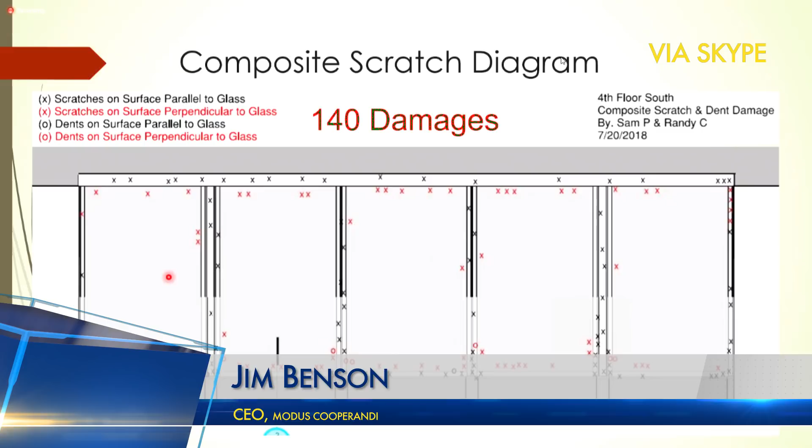So I'm going to share with you one of the first things we did. We went out and did an evaluation. A typical bay on this building has five curtain wall panels. We took 4 bays and overlaid them. So this panel right here represents 4 panels, and this one represents 4 panels. It's an aggregation of 20 panels that span from a column here all the way over to a column here, and we've just marked where we were seeing issues with the curtain wall installation.

So the X's represent where there were scratches or mars in the curtain wall, right? Correct. A red X is a scratch on the surface perpendicular to the glass, and a black X represents a scratch on the surface that's parallel to the glass. The O's represent dents, so we've got dents and scratches—one's a slightly more severe situation. But we really didn't know what we had, so we wanted to first accumulate some data so we can make an intelligent assessment of what we need to fix. So in these 4 bays, we had 140 defects or scratches.

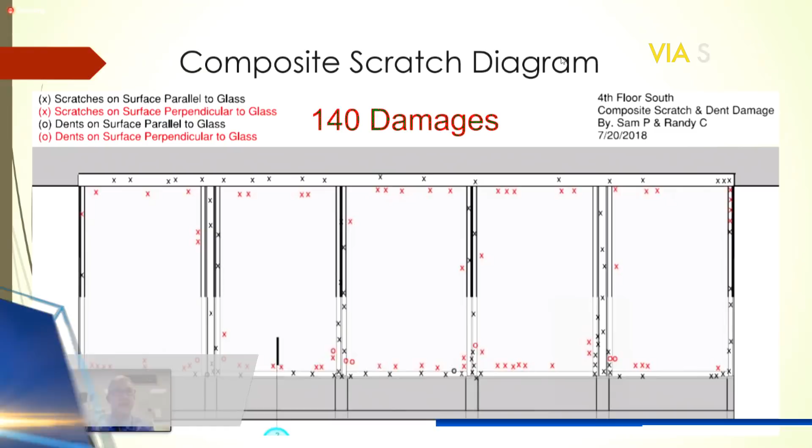So the next step we undertook, because now we had clues as to where the damage was occurring, we said, okay, why don't we look at the work going in, so maybe we can figure out how the scratches are actually getting onto the curtain wall panels. So the first thing we noticed was we were using hand trucks.

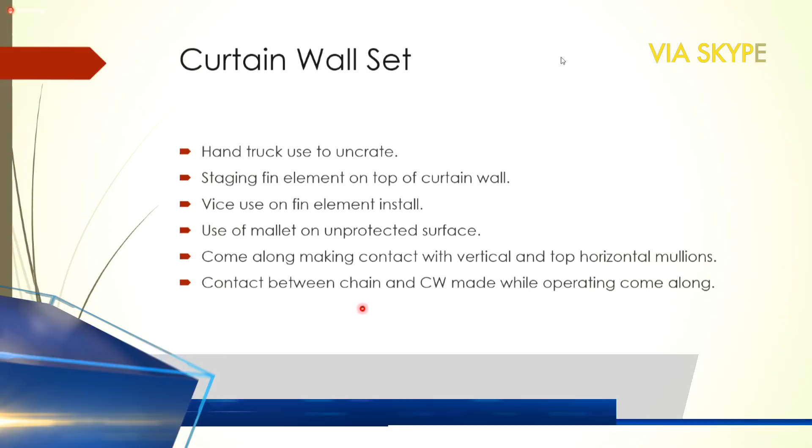You want to take this, or you want me to continue? Well, just really quickly, in the previous slide, in the right-hand corner, there was a name of a couple of supervisors who were largely responsible for doing the groundwork. And the most remarkable thing for me was, we talk about going to the Gemba and seeing where the problem is, and that was in no way standard work for them before. But once Charlie got them to go out and take a look at what was going on, they very quickly realized it wasn't just going out to stare at somebody, it was going out to interact with them. He'll cover that more in a little bit.

The thing that was most remarkable to me is the first meeting I attended, Randy, who ended up kind of shepherding this process—initially he was sort of able to describe what was going on, but by the end of this experience, he was not only an expert in what he had done, but he actually now understood something I don't think he really had before: total comfort with the problem they were dealing with, how they dealt with it, and the outcome, which meant he understood the narrative of the problem and could describe it. It was remarkable that his personal presentation style entirely changed during this process, because he was allowed to become comfortable with a given problem, which gave him more comfort as a professional. So after that, I'll step back and let Charlie take it.

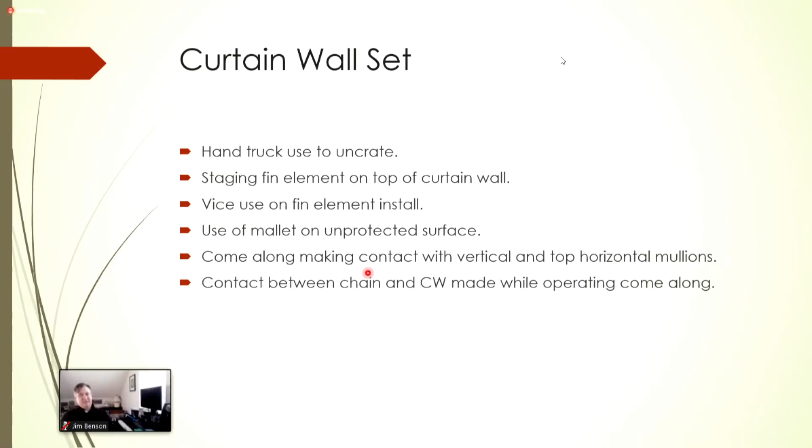All right, interesting. So Charlie, what did they find then? So we found a few things, but I'm going to back up just a little bit. Up to this point, we had been doing some experimentation with A3 problem solving, and this had been ongoing in our business unit for about 9 months.

We had senior level managers who took to it immediately, and we had senior level managers who really pushed back. I think the way we presented it to our people internally, here's a piece of paper, it's got a fancy name, there's a lot of Japanese terminology associated with this process. A lot of people resisted because it was new and it was a thing.

So when we went out and engaged Randy Castillo, who at the time was less than a year with the company, right out of college, we didn't use any of the terminology. We just asked him to identify where we were having problems, quantify it, and then go out and look at the work. We didn't use words like Gemba. We didn't use terms like A3 problem solving. We just asked him to go out and look at the work.

And this is what he came back with. Based on the heat map he put together, the first thing he did was figure out where the damage was occurring. We started to see things like the hand truck that we used to carry these 2,200 pound curtain wall panels had a raw metal edge, and that was rubbing up against the curtain wall panels. Ah, sure, this might be a clue.

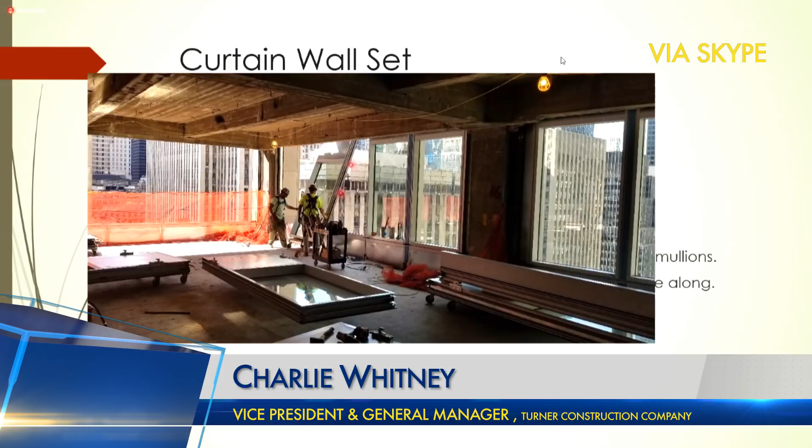Now over here, this is our building, we're looking out the window. This panel is one of the 5 we saw before. This weighs about 2,200 pounds. There's 2 guys upstairs assisting with the set. This panel is getting ready, and there's a fin on the outside.

Well, this fin is being staged directly on top of the panel. This is common practice. I would say these installers aren't doing anything any differently than any other high-rise around the country. It's what they've always done, but we were starting to look at this with a much more critical eye.

Interesting. Then we started looking at how, so there are some pieces that have to get snapped into place. There's no screws for these, it's actually a snap cover. Well, to fasten these covers on, they were using a vise to snap the covers on. Again, if you notice, we had some dents and scratches on the face of the curtain wall mullion that was parallel to the glass.

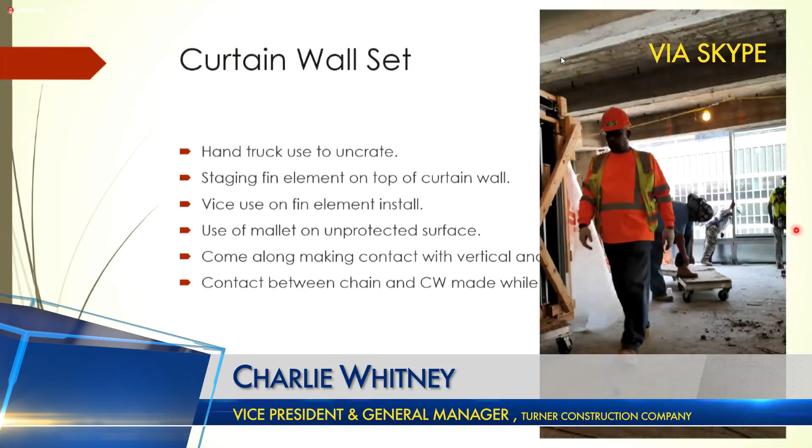Now here, if you look on the far right-hand side, we're knocking 2 panels together. That's actually a rubber mallet they're using to snap the 2 panels together during installation. When you look at this in the context of the heat map, you say, oh my goodness, no wonder we're getting all these scratches.

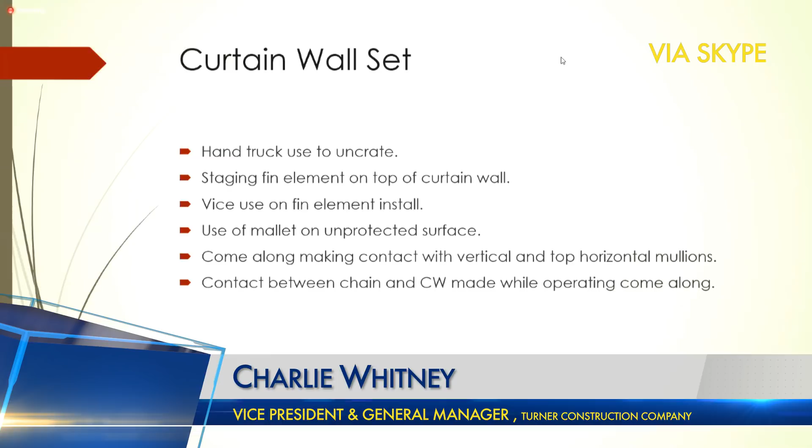Now here, we're lifting a panel up, and you can see a guy cranking on a chain fall. Well, that chain fall is awfully close to a vertical mullion. It's rubbing against it, yeah, it's rubbing against it.

So now when you go back to the slide we were looking at before, you can start to see we've got things here from fins, we've got damage here due to the clamps, and we have a nexus of low X's that lines up with where the come along is. So when you go out there and watch what's going on, you're really able to make sense out of this map. It's obvious where these are coming from.

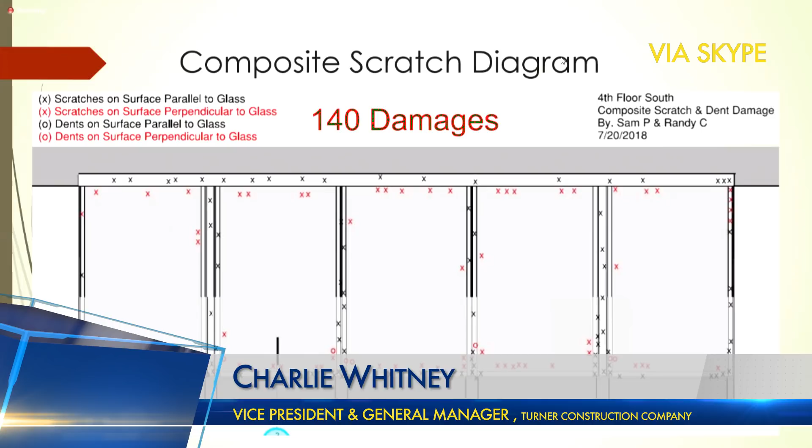I don't want to speed you up too much, but so once you realized what was causing the problem, you were able to go out there, see it, identify the problem. What was the next step?

So this is where this young man, who at the time was 23 or 24 years old, did something extremely mature, and I think it took a lot of guts. He went out and got a bunch of local 580 iron workers, brought them into a conference room, sat them down and said, 'Hey guys, we're having a lot of damage to the curtain wall panels, and we're not here to yell at you. We're here to ask your advice. You guys are the experts at installing curtain wall panels, and if I show you my map, can you tell me how we might be able to reduce some of these scratches?'

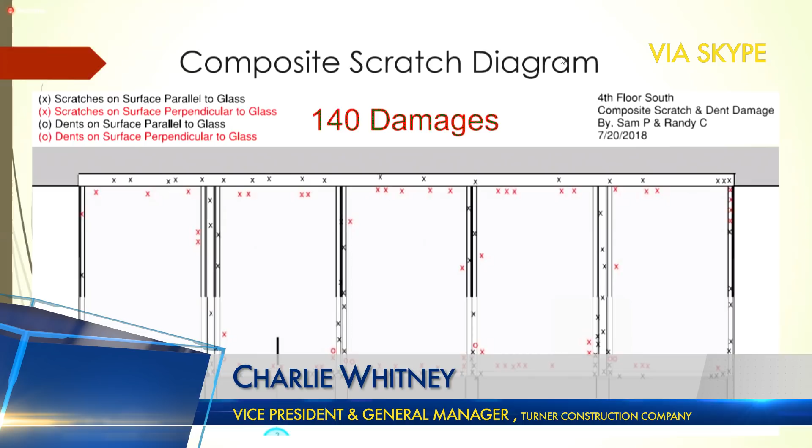So they sat down. That is mature. Oh, it's brilliant, yeah, yeah. It's brilliant in its simplicity. So they came up with a bunch of strategies to help reduce the scratches.

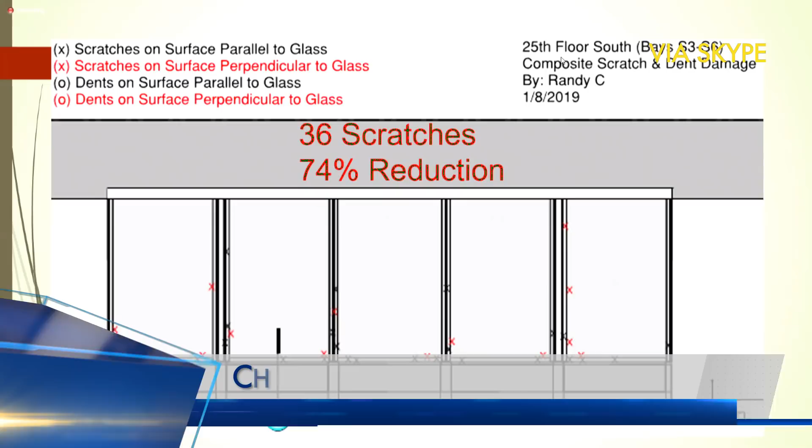And this is an aggregation of 4 more bays, or 20 panels. Before we had 140 scratches, now we have 36 - a 74% reduction in damage to the curtain wall panels. Wow, that's pretty amazing.

Well, let me ask you - you touched on something here. You mentioned the maturity of that guy, and Jim, you've worked in a lot of different industries as well. But maybe let Charlie answer this. Within the construction industry, particularly on a large site, you've got a lot of different trades, a lot of different unions involved, and when it comes to pointing out problems - hey, you guys should do this, you should do that - it's kind of a tightrope act, I would imagine. So he handled it the right way, but how do you teach people going forward that once you've identified a problem, there's a way to approach solving it and getting people on board, other than a top-down approach, which you probably can't do in many environments anyway, particularly a job site?

Well, this was interesting, because Randy had a whole new set of tools in his toolbox. I'd say 10 times out of 10, if somebody in the business even 5 or 6 years walks up to a tradesperson and just says, 'Hey, you're doing that wrong, you need to do better' - you're not going to get a big hug.

So what Randy did was go out and sit down and say, 'Look, I've been watching you work. I don't have the answers, but I do know that when we do the curtain wall installation on this project, we're scratching the curtain wall. I don't have the answers, but I'm coming to the people that are the experts, and I'm asking you to help me solve this problem.' And that's how he got the outcome.